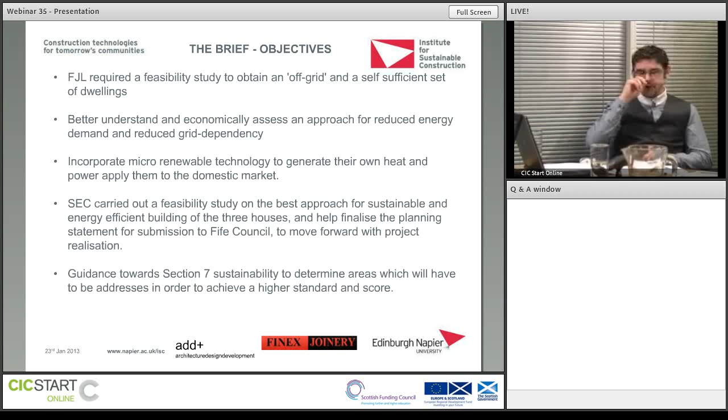So now I'm going to pass over to Stuart Hanna from add+ Architects, and he's going to go through aspects relating to the site and to the design of the properties. Okay, thanks, John.

The first thing I'm going to speak about is why this site specifically was chosen. Finex are a Fife-based company, and they're well aware of Fife Council's ambition to be a green council, so therefore Finex looked for a site within Fife. The site selected, there's several things that they looked at. They looked at different sites, but many sites proved unsuitable due to the urban setting. There's overshadowing, there's noise pollution, various things like this.

This site has a very open aspect, it has southerly views. It makes it possible for PV panels, and that was one of the first things that they really wanted to look at. There is space on this site as well, space to trial the different technologies. For example, if wind turbines were something we were going to look at, we had to be sure that it was something that we could accommodate.

There are other features on this site as well. There's an existing reed bed next to the site, which is going to come into play as part of the drainage solution for the development. But also there are services nearby. There's water on site. There's also electricity adjacent to the site.

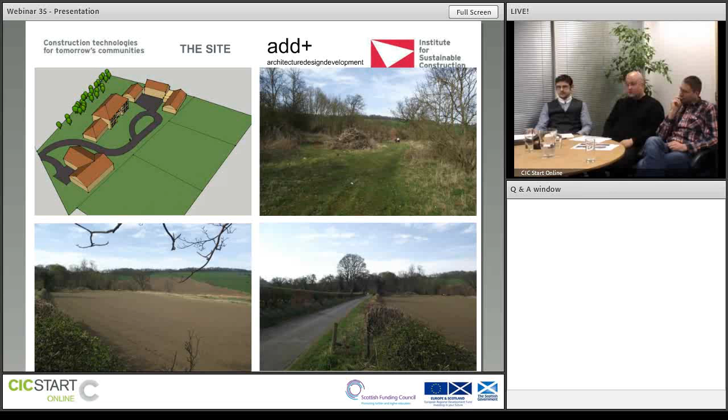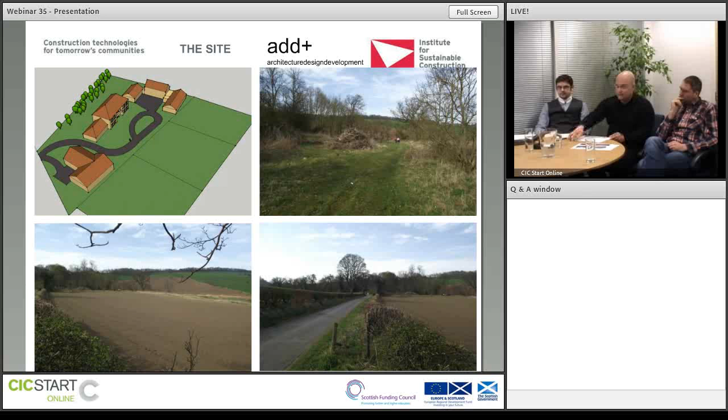The history of the site is quite an interesting one as well. It's a brownfield site, and it was previously used as a World War II aircraft repair centre. You can still see the remnants of the foundations on the site, although it has been slightly overgrown in recent years. But historically there were 3 buildings on the site, and again that lends itself quite neatly to what we're trying to trial here. We wanted to reflect the history of the site. There are 3 houses that we want to develop, and there were 3 buildings previously on the site.

I'm going to look next at the dwelling design. What Finex were keen to do, and what I'm also keen to support them in, is that rather than having a typical modern looking energy efficient design solution, they wanted to show could traditional looking homes be built but with the same up-to-date standards and methods. They wanted to create a typical farm cluster which is common in the area and around about the site, and they wanted to fit in with the surrounding area. So really to some extent it's a modest approach that Finex were trying to take on here with regards to the site and the environment.

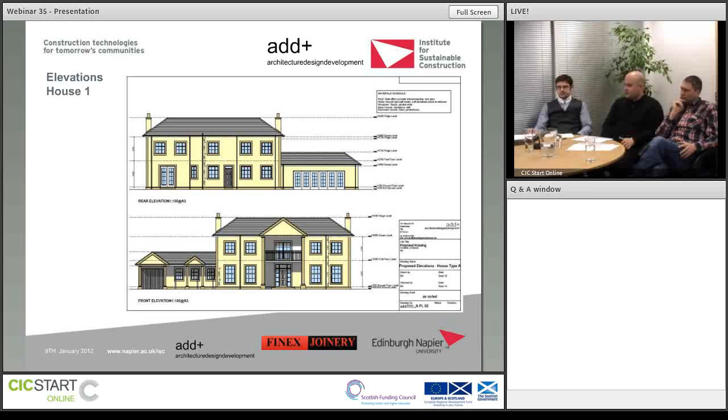The site itself, I mean, we're looking at a farm cluster, I suppose. There's the main house, which is elevation 1, I think John's now showing here, is a big house. It would use the Beattie Passive system. I'll come on to the systems to be used in a moment. But there's the big house, there's the farmhouse, again a kind of traditional typology with the outbuildings, etc. And lastly there's what we've termed the gatehouse, right at the entrance to the development. And again you can see the elevations here. If we just move through onto the arrangement of the cluster.

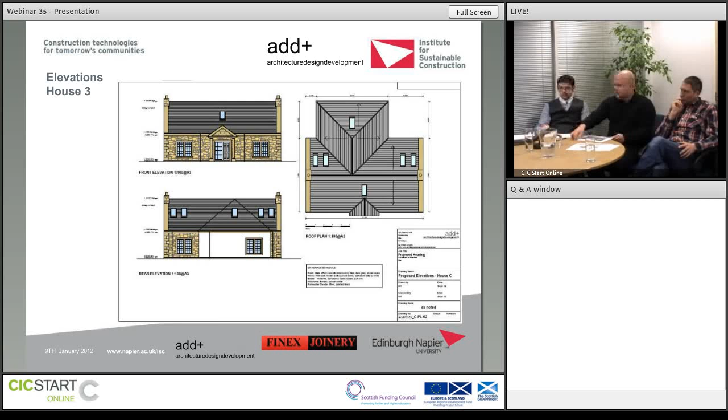They've been arranged in such a way as to be a kind of typical cluster development, and as I say, in the surrounding area, there are several of these already in existence. So we're not trying to do anything that's alien at all in terms of its setting, but rather we're trying to complement what's there, while at the same time doing something which is thoroughly modern and completely, as far as we understand it, unique at the moment.

So I'll move on to the building systems which have been chosen. The first system to be chosen, that was for the biggest of the houses, is the Beattie Passive system. The farmhouse is to use the SIPs panel system, and lastly the third method selected was an augmented timber kit. I'll just spend a moment or two talking about the Beattie Passive system. It's a system which is relatively new to the market, and there have been some houses finished in the Fife area using this system.

The main feature of the Beattie Passive system is the continuous building insulation envelope. That's something which, as far as I'm aware, only the Beattie Passive system has. It's the lack of, or the minimisation of cold bridging, which is its main feature. It is also a certified construction by the Scottish Passive House Centre. Again, it was the first system, as far as I'm aware, to achieve this accreditation.

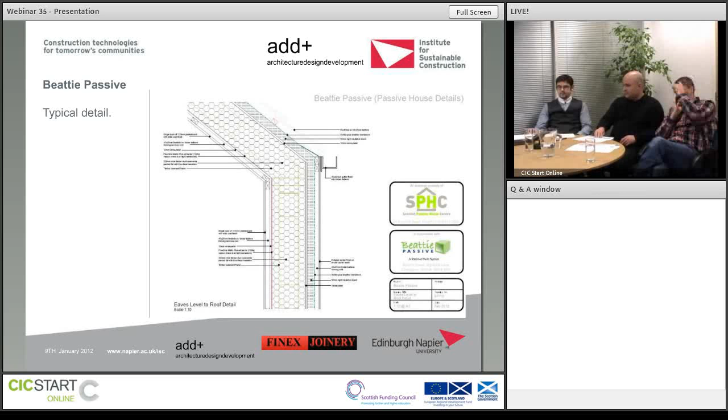So that's what we're going to be using for the first house. There's a slide there showing a typical detail through the building envelope, and as you can see, from roof to wall, there really isn't much difference. It's a continuous building insulation envelope, timber frame, or a variation of a timber frame with a kind of large void which is filled with insulation.

The next system to be used, and that was used on the second house, the farmhouse, is the SIPs panel system. Again, it's not as new to the market. In fact, there have been SIPs systems built in this country for around 40 years now. The main features of the SIPs system is it's an off-site prefab panel system which would minimise construction time on site. Again, it has high insulation values, as does the Beattie Passive system.

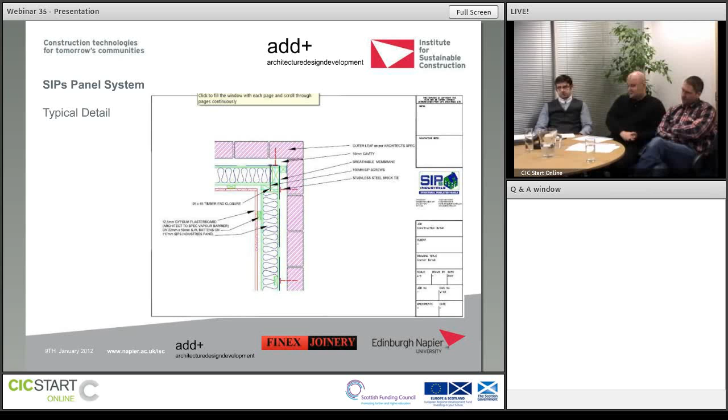The last system that we're proposing to use would be an augmented timber kit system. The reason for using that was that timber kit is fairly traditional in the area that we're going to be building in. It's a construction technique that most are familiar with, and so really what we're looking at is taking a traditional timber kit system and sort of augmenting it to a level where it is of a higher insulation value. In this case, what we're proposing to do is have an offset stud, again to increase the insulation void.

In the case of all three systems, what we're looking at also is a very good value in terms of their airtightness. So really, in terms of the building, the main drivers in terms of design and common to all three systems would be good airtightness and good thermal insulation.

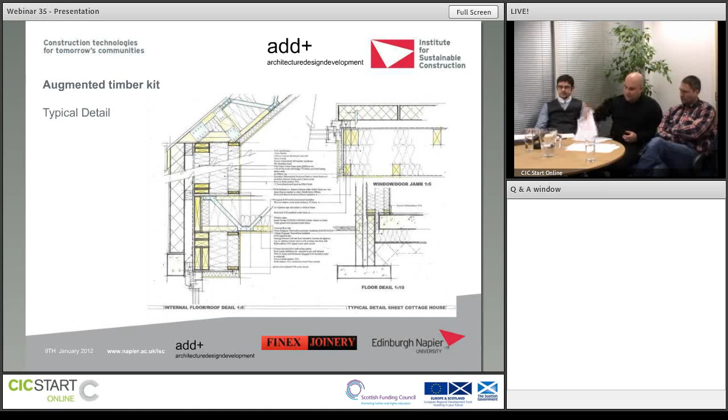Before I hand back to John, I'll just quickly tell you about the need for the study. The first thing is Finex were looking for independent expert advice, and they were introduced to Napier University through Fife Council's Building Standards Department. They were aware of lots of claims on performance and wary that some of these may be sales driven for the various sustainable technologies that are out there. So really what they were looking for was an independent voice in the midst of all the choices that were there. Initially it started as an aim to build an energy efficient home, and then it developed in a desire to be off grid.

So as Finex and many of us are new to this type of technology and unaware of everything that's available, they thought that it would be good to turn to the Institute for Sustainable Construction to look into this with us. But in ourselves, we would also be unable to predict how these houses would perform, so again we're interested in a feasibility study, also to assess whether the site was suitable for some or all of the technologies that are out there, for example wind turbines, PV panels, that sort of thing. I'll hand back to John now, who I think is going to talk more about the report.

Good job, thanks Stuart.

I'm going to go through briefly just the methodology that's set out on how we were to investigate these three dwellings that Stuart had designed. And essentially, Stuart had adopted, as you've seen from the slides, a very strong fabric first approach to all of the three dwellings. So whenever we came on board, we conducted a site survey, and this was a twofold approach. It was trying to see how much space we had for various technologies, and also to see the geographical layout and see what technologies we can omit from further research.

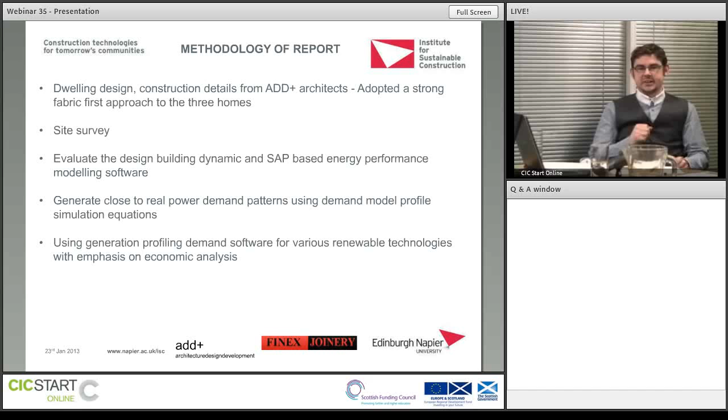The actual report was broken down to three main categories. The first was we modelled each of the three dwellings to establish the heat demand load. Then we simulated the occupancy to try and get an estimation of how much electricity it would need. And then from those we were able to size the type of technologies that we're going to provide on-site power and heat generation.

So once we arrived at the site, and as Stuart mentioned, we established that there's no immediate mains gas or electricity connection, so we were looking essentially off-grid. Looking around the site and seeing the lie of the trees and the local surroundings, we could rule out a number of technologies pertaining to wind and hydro, for example.

And we also had access to an adjacent site to where the houses are proposed to be built, and this site was going to be able to house technologies and to allow for maybe a much larger farm type establishment of different technologies. And the report then speaks a bit about the foreseeable issues relating to living off grid and the challenges to providing sustained electricity, continuous electricity supply to a house all day, all year long.

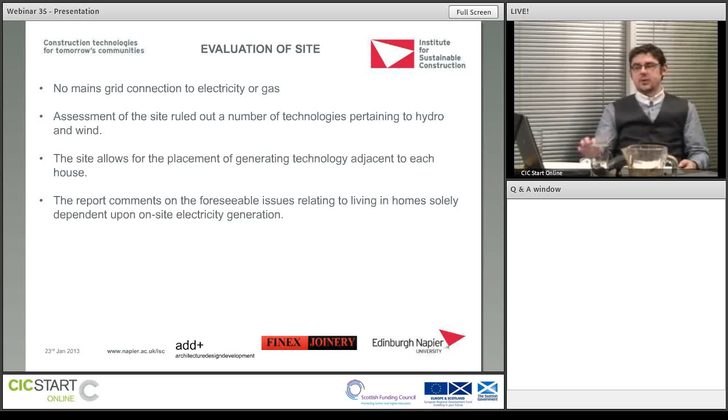Not all that dissimilar within reason to the Code for Sustainable Homes, but same objective. It's an optional design category to look at making homes more energy efficient using sustainable technology, etc. It's a reward-based scheme, which is awarded a colour based on silver or gold, and platinum is being introduced soon. Each of the silver and gold labels are met with 8 aspects. These 8 aspects have to be met in completion before that particular dwelling is assigned that particular colour of label.

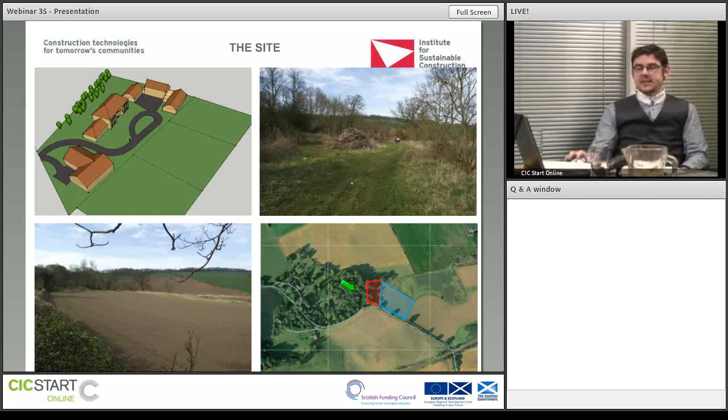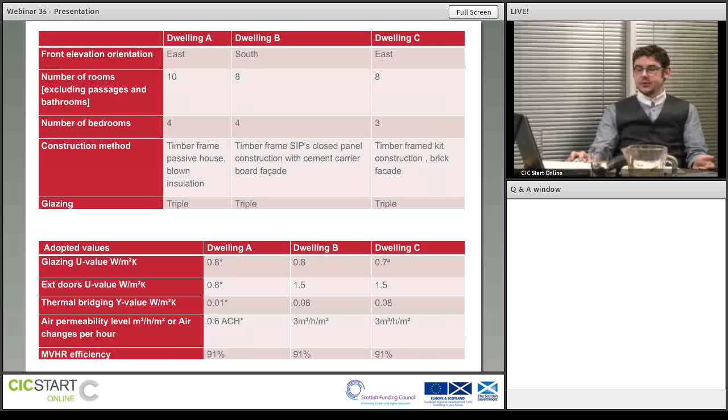And the reason I mention this is our feasibility study was essentially looking at the first three aspects. This slide has changed. Anyway, I have the first 3 aspects, which I don't seem to have here on my slide for some reason. The first 3 aspects relate to the carbon dioxide emissions based on the DER against the TER. Aspect 2, which is the space heating requirement, kilowatt hours per metre squared per year, and the third aspect was generating hot water based on renewables or recovery on site.

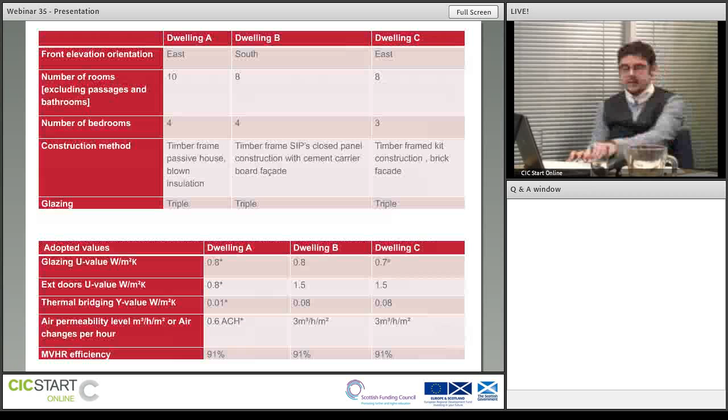So out of the 8 aspects, we essentially looked at those 3 as benchmarks of performance to compare the 3 designs, and we omitted the other 5 aspects because they're more design based, looking at acoustic performance, materials selected, low flow water taps, accessibility, flexibility of design space, which is really within Stuart's remit. So we were looking more specifically at what those buildings were in those 3 aspects. There we go. That's the reason why I missed a slide.

So these are each of the designs that were put into the modelling software. The parameters or the categories based on each individual building component or the U value, wherever it may be, were either pre-selected by Stuart or by Drew about what the value should be for the openings, the doors and windows, or what the air tightness level should be. The first dwelling we have marked here as dwelling A was that property that's been designed under the Passive House standard that Stuart had mentioned.

And essentially, Passive House have quite a rigid design parameter when it comes down to heat loss. So those values chosen there in the bottom table come from the design standards within Passive House. Of the values chosen to virtually construct the models for B and C, what I really want to focus on here is the thermal bridging and air permeability levels. These are values that can essentially be manipulated or massaged, if you like, within different modelling programs. And based on these values, you can essentially hit or miss a gold level standard by a couple of kilowatt hours per year per metre squared.

The values that we chose for B and C essentially come from what we have experienced in our post occupancy evaluation, our building performance evaluation. Air permeability values, for example, were set at 3, and that comes down to what we have experienced can be achieved realistically on site using modern methods of construction, and these values will have to be proven with completion testing as well. So the values put in here can bring down your annual heat demand consumption, but also need to be justified at the end. The values for the thermal bridging were also put into parameters within what we expect to see, and those were constructed on the back of virtually building these up within a certain modelling program.

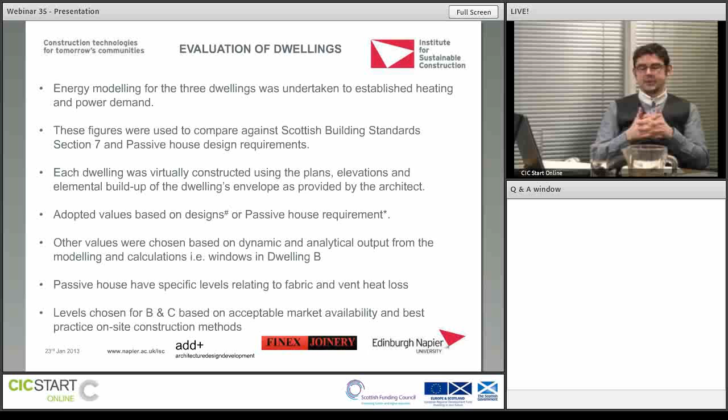So, like I mentioned before, we virtually constructed the 3 dwellings in 2 pieces of software. One was a dynamic modelling software, the other was an analytical or numerical piece of software. We noticed the outputs from both types of software produce slightly different results when it comes down to the space heating requirement, and in essence, the numerical modelling produced a much lower value, whereas the dynamic modelling produced a slightly

higher value for various different reasons. The outcome of that influenced the rest of the research, the rest of the feasibility study. We would foresee the dynamic modelling being quite close to what we expect to have witnessed when the houses are constructed and how they're going to perform, but ultimately it's the numerical modelling which is going to be used to achieve building standards section 7, and that's going to be compared against what the houses are going to be consuming. But on that end, we were using the dynamic modelling output to size our renewable technologies, which we'll come to in a few moments.

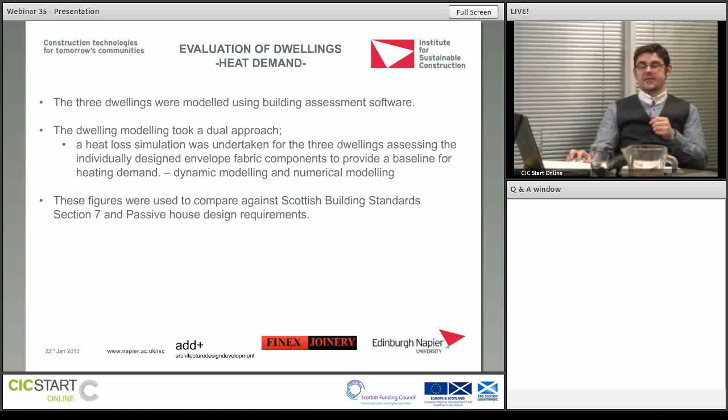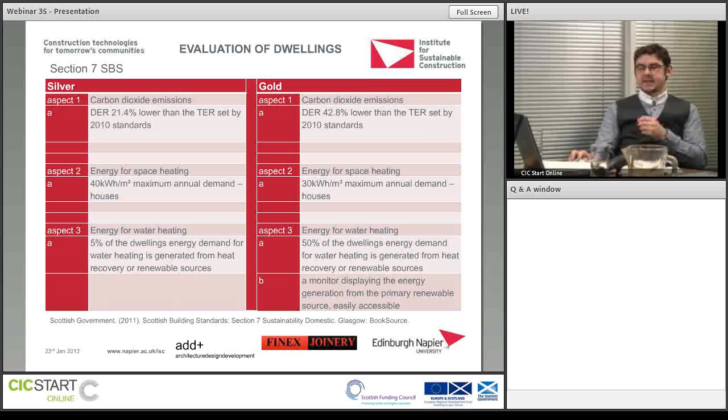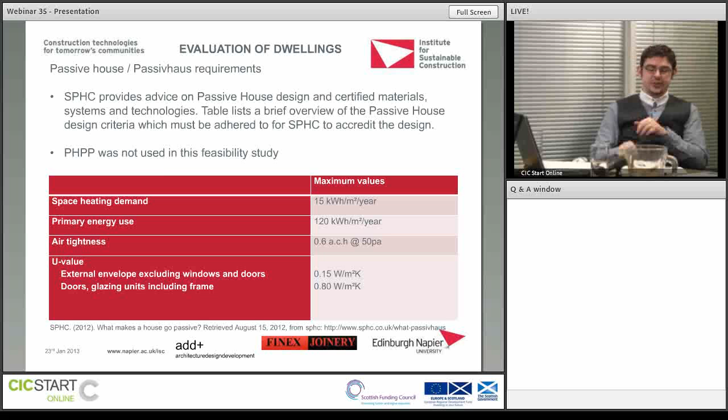So I went through that slide earlier about what Section 7 is, and there's my slide there about the 3 aspects - I'm not going to go through that, that's simply for those who are looking to see a bit more on what Section 7's 3 aspects were demanding. This is the table that was provided to us by the Scottish Passive House Centre. As I said, this is the values that we used to construct the first dwelling, the passive house dwelling.

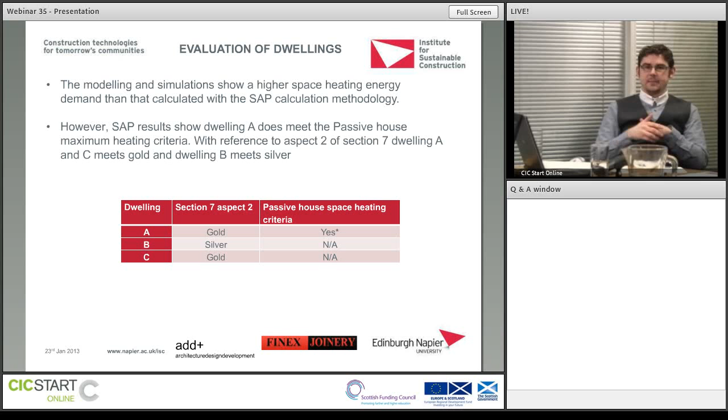So out of the numerical modelling, what we seen was dwelling A and C achieved gold under aspect 2 - they were under 30 kilowatt hours per metre squared per year heat demand, whereas B was slightly higher, it was just below 40, which meant it was in the silver category. The report goes on to say how we can manipulate building B to perhaps achieve that aspect for section 7, which we'll come to towards the end of the presentation.

I'm going to speak a little bit more now about how we calculated the power demand or the electricity required for the houses. What I think is important to mention here is the complexities when sizing technology to sustain off-grid properties. A lot of the work that we have done in the past with energy monitoring programming, we've seen that essentially what you can pretty much guess yourself is a large part of the generation for electricity is going to be during the day, but a large part of the demand is probably most likely going to be in the evening, or even in parts of the year where the sun is at its lowest.

So the overarching goal was to provide off-grid solutions. So what we had to do is found or developed a program that was to look at the occupancy pattern and to try and gauge a good understanding of what the power demand will be. So using a software calculator tool that was developed by Loughborough University, which we have manipulated to our own needs, we were able to predict the active occupancy and look at a number of parameters based on what we knew

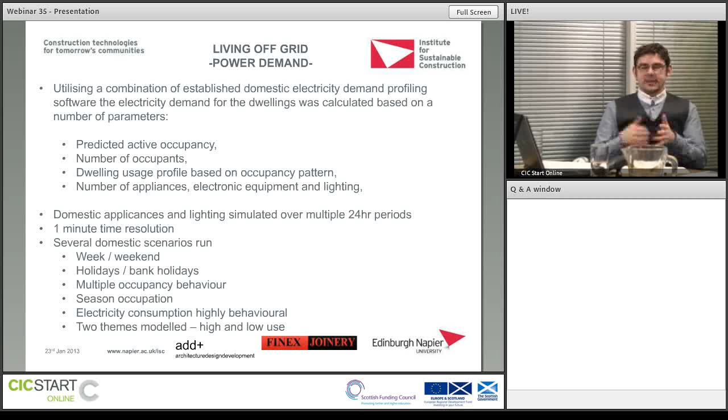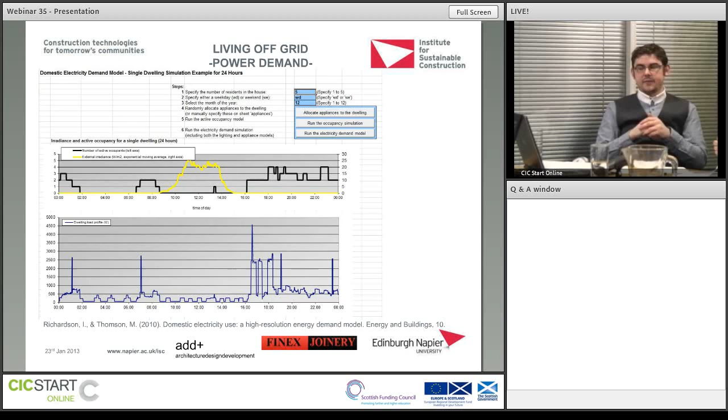from what Finex and add+ had provided us - the number of occupants, the appliances - and we began to simulate scenarios of when these were going to be used, how they're going to be used, how energy efficient each appliance was, and then we developed different scenarios based on different times of the year, different times of the day, and ultimately to that end we were trying to achieve a peak energy demand and also a baseline energy demand, and also a yearly consumption that was going to be used to move forward and start to design the different technologies.

So what we did and what we thought was prudent at the time was to develop two profiles, which was the higher model profile and lower model profile, and this was based on what we know from doing some behaviour monitoring energy with energy monitors in the past, where we see different trends within people's behaviour based on how they interact in their relationship with energy.

So what we did essentially was we looked at maybe an energy frugal family who was going into these homes and they were keen to reduce their consumption, change their behaviour, modify their habits and reduce their consumption based on the fact that they are living off grid and lifestyle changes would have to be made. And then we also felt it important to look at a family who were living on grid, who came off grid and were bringing across a lot of their habits and habitual routines with them.

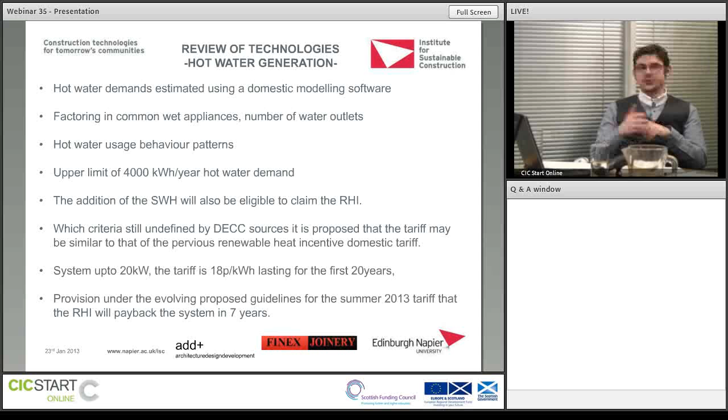The financial incentive is set to last for 20 years, and through our calculations and modelling, we saw that the technology we chose, and the cost we obtained, were able to fulfil those requirements, paying back within 7 years while producing that amount of heating for the properties.

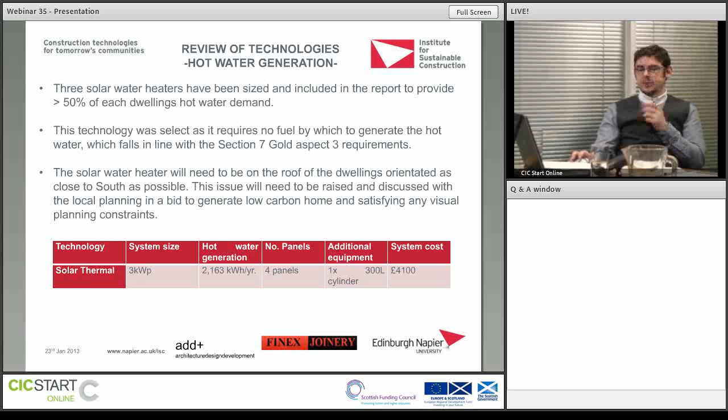Again, this is simply just a breakdown of the system that was chosen for the site. That's there for those who are interested in any great detail.

Looking now at the systems chosen for the power generation, for off-grid power generation we looked at PVs with a battery bank, and a quite substantial, healthy PV farm that was built. It was going to be erected at the site adjacent to where the houses are going to be built. This came back to what Stuart was saying about having homes that satisfy all the energy efficiency requirements, satisfy the desire to have renewable technology, while maintaining this traditional facade. One of those parameters was trying to keep as many of the technologies off the roof and off the main building as possible.

So what we then went on to do, we sized the PVs based on the generation we thought was applicable using the power generation modelling tool, and then we ran that through an economic assessment based on what the system would be achieving financially through the government incentive. We also looked at costing the system and having a capital expenditure based on the return on the system.

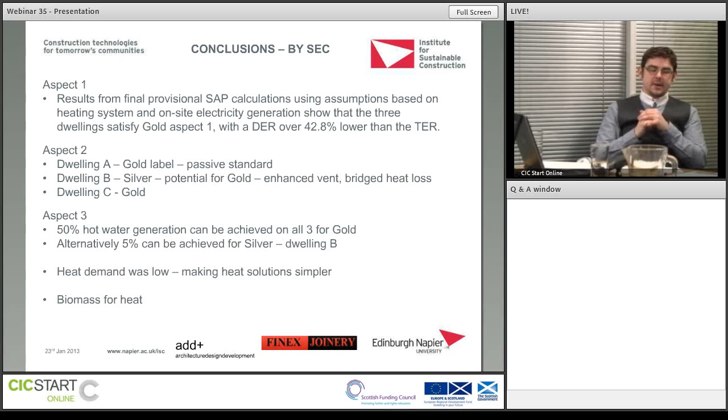Aspects 1 and 2 were fairly easily achievable, simply because these properties had a high thermal envelope, and after adding on the biomass boiler and the PV system, aspect 1 is fairly easily achieved as well on numerical modelling. Coming back now to the labelling for the three dwellings.

Dwelling A was passive house, and the passive house standards, if you loosely compare it to what Aspect 2 was looking for, if you design a house to the passive house standards, you're going to achieve Aspect 2 fairly simply, because it's much lower. That 15 kilowatt hours per metre squared per year is much lower than the 30 demanded by Aspect 2 gold.

Silver, or Dwelling B, missed out slightly on gold on that aspect. Doing a little bit of revised modelling on that building, we've seen it could be achieved if we looked at a better U value for the doors and windows, decreased the air permeability value, and got the thermal bridging value much closer to that akin to passive house. These are alterations that can be made within the design program that Stuart can influence and manipulate to a point that it's achievable, while also meeting the Section 7 gold for Building B.

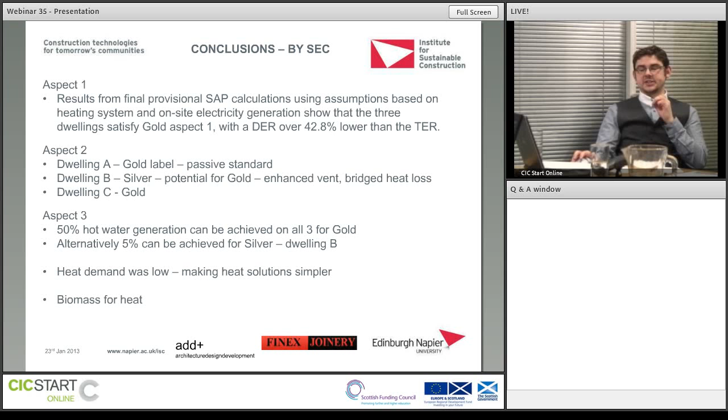I said Aspect 3 was certainly easy to achieve with the solar water heater within reason. But if Dwelling B was going to stay at silver, it would require a smaller solar water heater system to achieve the 5% from renewable technology, as opposed to 50%.

So that's all I have to say on the conclusions for our aspect of the report and the feasibility study. All of these things have been translated over to both Finex and add+ Architects through the report. Now I'm going to pass back over to Stuart, who's going to speak about how they're going to move forward with the plans and recommendations, what their thoughts are, and the future for the site and the three dwellings.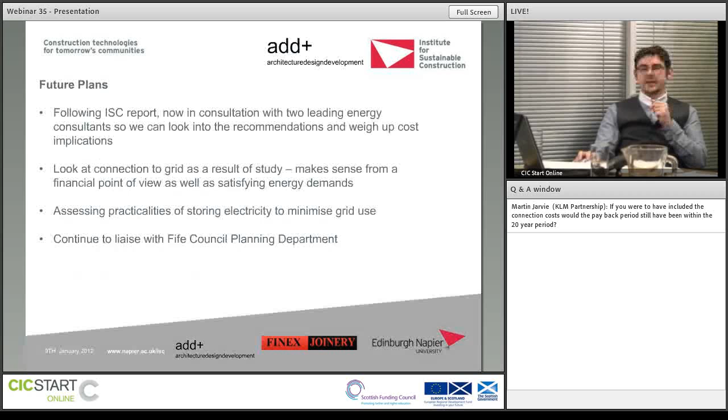Okay, thanks John. Just to update as to where we now are: we've received the report and we've been digesting the information. Following the report, Finex are now in consultation with two energy consultants, looking into the recommendations and weighing up the cost implications of various technologies.

One significant aspect to come back from the report was the desire to be off-grid. That's something which has now been reviewed. It would appear that it makes a lot more sense to have a grid connection, at least from the point of view of feed-in tariffs, but also the start-up costs, the capital costs of investment in technologies, and the payback period. That has certainly influenced our thinking moving forward.

We're currently assessing the practicalities of storing electricity to minimise grid use, but again, as we've heard from John, having the grid as backup is something that is now coming into our thinking.

We're continuing to liaise with Fife Council Planning Department at the moment, and we're looking to make a planning application within about a month or so. At least by then, making the application, we'll have an informed decision on the technologies we're choosing and moving forward with. We'll continue to work in partnership with Building Standards at Fife Council as well.

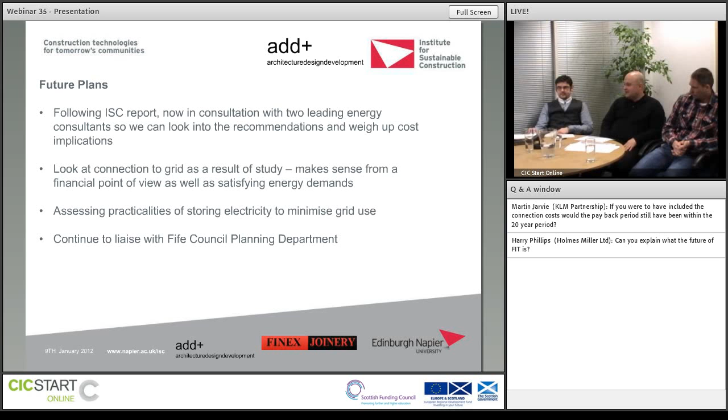Moving on, once we get through the construction process, we'll be able to trial these technologies by actually living in the houses and recording and reporting on the data received. As a result of all this, we're looking to review our approach, and Finex are looking to roll out a business model based on the information we now have. So I think that pretty much wraps up where we are at the moment.